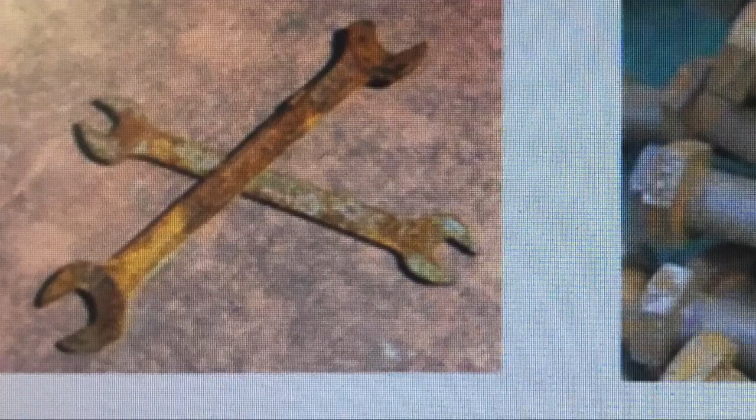Rust is an iron oxide, usually reddish brown in color. It is formed by the reaction of iron and oxygen in the presence of water. All metals can corrode, but iron rusts very quickly. If iron is allowed to get wet and exposed to air, noticeable brown rust can develop in only a few hours. Rust is permeable to air and water, so the interior metallic iron beneath a rust layer continues to corrode. Rust prevention thus requires coatings that preclude rust formation.

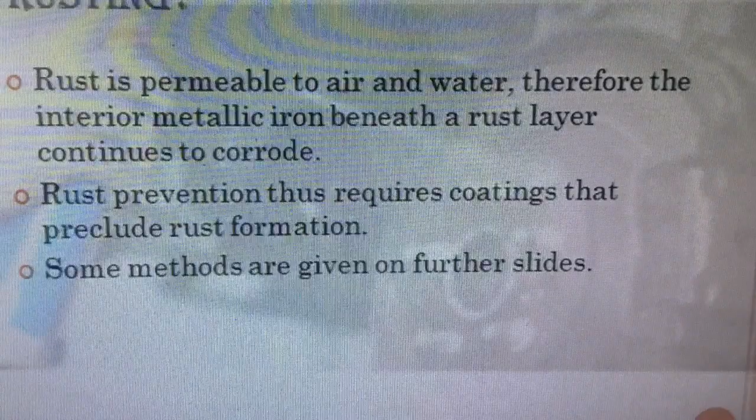Stainless steel forms a passivation layer of chromium 3 oxide. Similarly, passivation behavior occurs with magnesium, titanium, zinc oxides, and other electroactive conductive polymers. Special weathering steel alloys such as Corten rust at a much lower rate than normal because the rust adheres to the surface of the metal in a protective layer.

One of the most famous methods to prevent rust is galvanization. It consists of applying a layer of metallic zinc to the object to be protected, by either hot dip galvanizing or electroplating. Zinc is traditionally used because it is cheap, adheres well to the steel, and provides cathodic protection to the steel surface in case of damage to the zinc layer.

Cathodic protection is a technique used to inhibit corrosion on buried or immersed structures by supplying an electrical charge that suppresses the electrochemical reaction. If correctly applied, corrosion can be stopped completely.

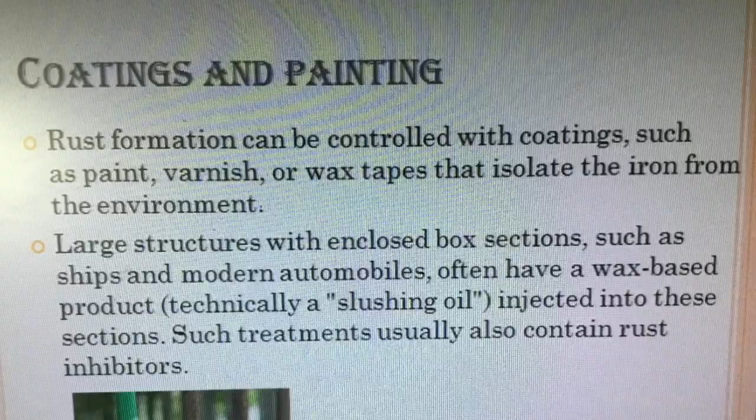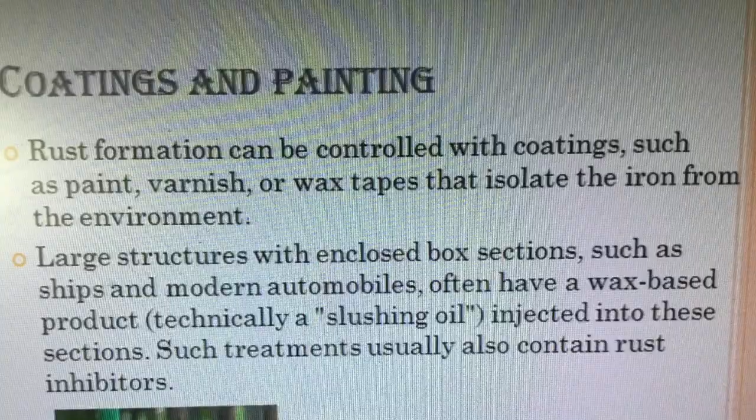Rust formation can be controlled with coatings such as paint, varnish, or wax tapes that isolate the iron from the environment. Large structures with enclosed box sections, such as ships and modern automobiles, often have a wax-based product, technically a slushing oil, injected into these sections. Such treatments usually also contain rust inhibitors.

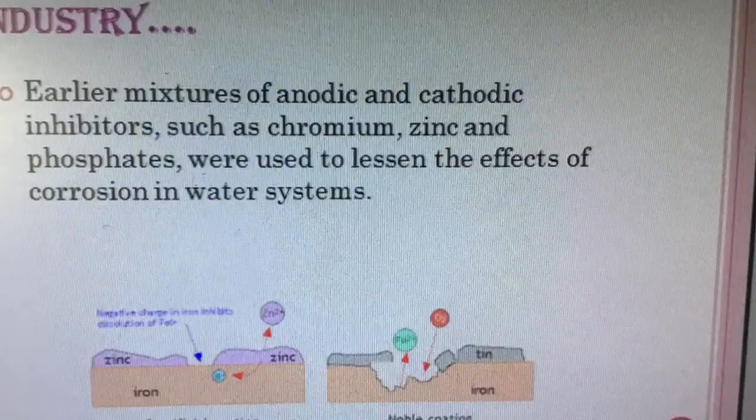The shipping industry faces many challenges, but one of the major ones is rusting and corrosion on ships. The industry tries to prevent rusting and corrosion in numerous ways. Earlier, mixtures of anodic and cathodic inhibitors such as chromium, zinc, and phosphates were used to lessen the effect of corrosion in water systems. In some cases, a polymer was added, which is also done today, to avoid problems of fouling on the metal walls.

To prevent microbiological growth, biocides such as chlorine and quaternary ammonium compounds are added under acidic conditions. Currently, chromates and acid pH values are being replaced by the use of organic phosphonates as corrosion inhibitors, while for control of fouling, polycarboxylate type polymers are used.

Material selection is one strategy to address corrosion. Corrosion control can be designed into the ship itself. Using high-quality coating systems is another strategy for battling corrosion on the ship.

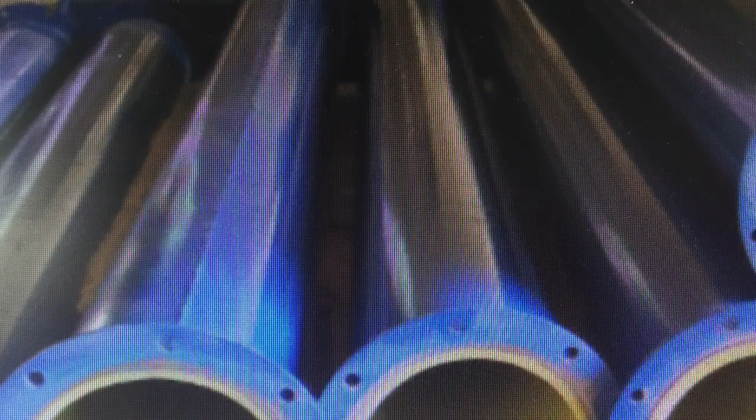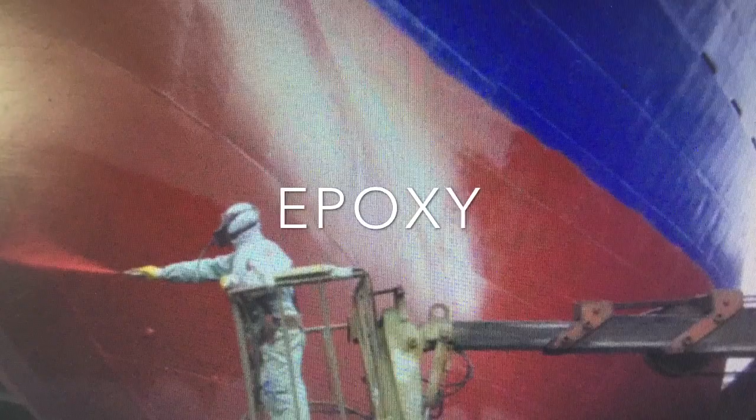Keeping electrical circuits on the ship dry helps to prevent and control corrosion. To do this, waterproof insulation around cable connectors is used.